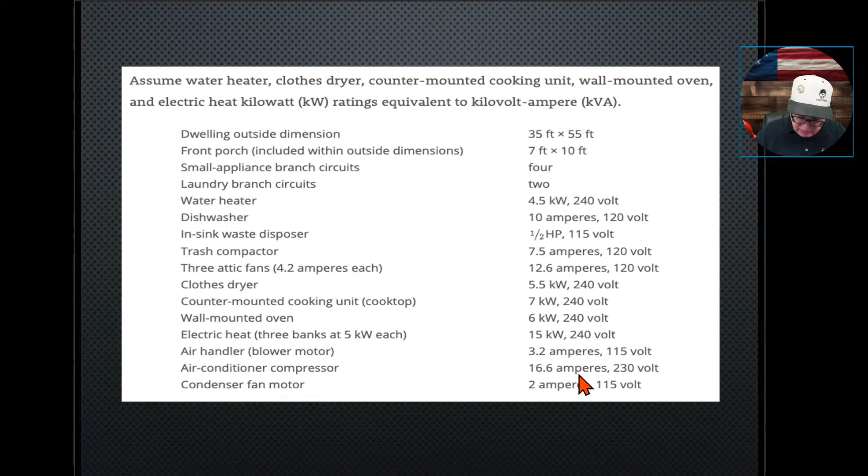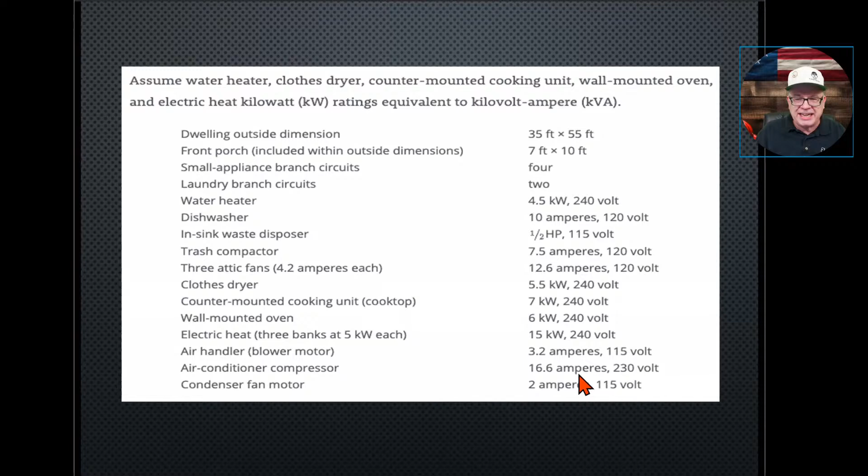This air conditioning compressor, they did the math for us, or at least gave us the amps. So we're going to use what they give us, 16.6 times -- never trust my math, do it yourself. We're going to use 230 because that's what the question gives us. Even though we know it's 240 nominal, we're using what they give us in the question. So in this case, it is 3,818 VA for the air conditioning compressor, just a pure value based on the calculation.

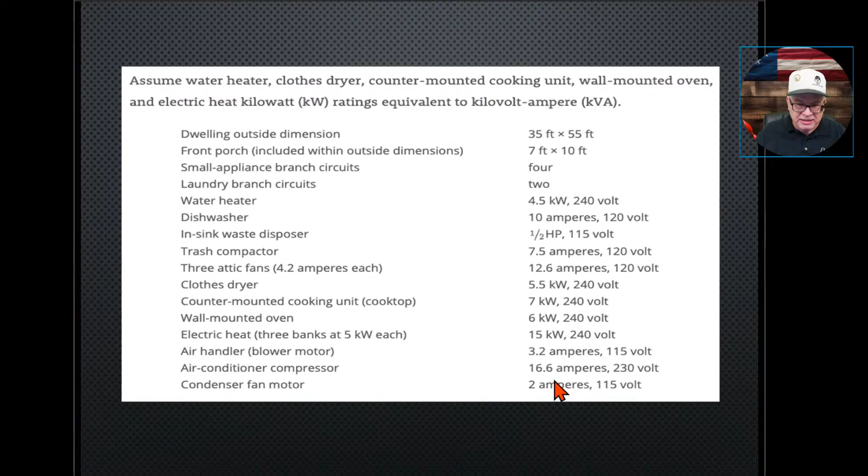And then, of course, the condensing fan, it would be 2 times 115, so that's 230. So we have all of our values here, so we can go on and see how we would apply this.

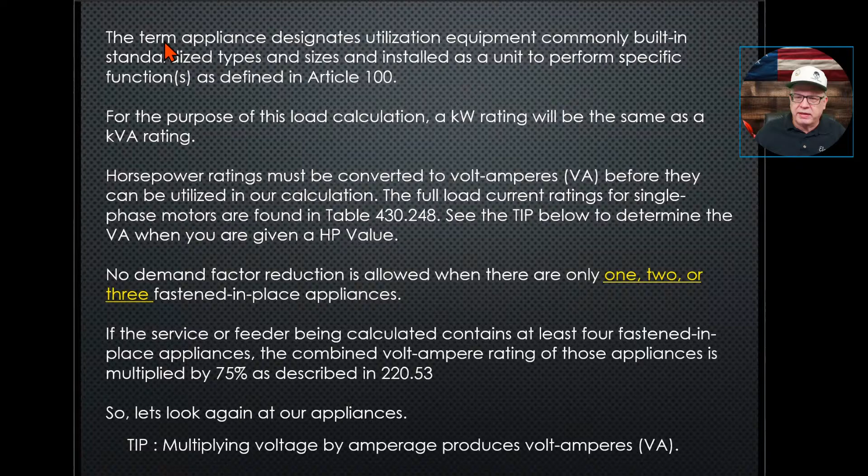So now we just skip to here we go. Okay, so in our case, this is what we're looking at right here. The smaller of the two or more non-coincident loads can be omitted as long as they are never energized simultaneously, as stated in 220.60. We kind of just talked about it.

And people say, let me see that. I will, I'll take you here. It's right here. It says: if it is unlikely that two or more non-coincident loads will be used simultaneously, using only the largest load of the items that will be simultaneously used at one time for calculating the total load of a feeder or service shall be permitted.

So for us, it's a permissive rule. If you want to add up all of the loads and do it, and if you're one of those engineers who says, well, I don't want to take the chance, I can't ensure 100% of non-coincident abilities, then maybe you size everything to 100%, but never for an exam, okay?

So there's a reason they ask you a question on an exam or dealing with it. Now, in the real world, you have to do your due diligence. You have to determine whether something is truly a non-coincidental load, whether there is some type of interlock that prevents one thing from running when something else is running if they're being supplied by the same, let's say, feeder. You'll have to determine that. And that's how we determine that in the overall service.

If I look at it and go, is this going to be running, but another load cannot run at the same time as this load? This load is greater than this load, but this lesser load can never run at the same time this one's running. If that's what you're evaluating, then you're able to discount or remove the lesser of the two because you're going to be taken care of by going with the largest load.

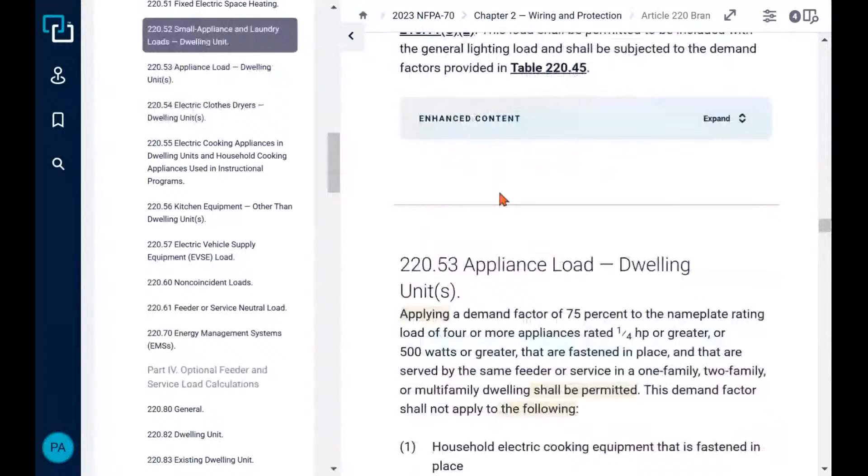So we kind of already did this math a minute ago, but let's go with the first one. So let's compare the heat. So we know that this heat, in accordance with 220.51 in the code, and let's go look at it. Here's 220.51. Bear with me here. Here we go. So the fixed heat portion says fixed electric space heating shall be calculated at 100% of the total connected load, okay? So that's the part we're keying on right here. So that's how we're at the 100% for that fixed load.

So that's 15. So we have the 15, but now we have to realize that it's not just the heat, we also have the blower motor that's going to blow that heat around the building, right? So we have to add that in. We already did the math here earlier. 3.2 times 115, that's 368 VA. Since the loads are going to be operating at the same time, obviously the air handler is going to be running at the same time that the heat's going to be running, then we have to add the two together. So we'll take the 15 plus we'll add the 368 to it. So the heating contribution here is 15,368.

Now, many of you that are already used to doing this, that you've done load calcs before, or that are very savvy at this, already look at this and go, well, I don't even have to look at the AC, right? Because I know that the heat is going to be greater than the AC. But what I need to do is to show you, because it may not be. This one's pretty easy, but it may not be. So you have to go through this exercise of comparison. And this also causes quite a bit of confusion to people when it comes to how do you apply a non-coincident load calculation when it comes to two loads that are non-coincidental, like heat versus AC that are thermostatically separated.

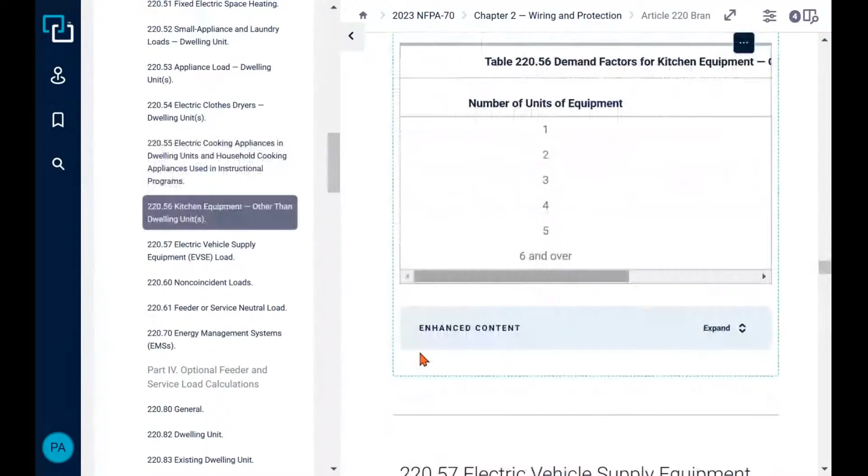All right, so if that's the case, then we have to look at it and say, okay, well, let's go to the NEC. They worded that terribly. We've tried to change it for years, but I'm gonna try to lay this out, James, and make it a little easier for people to understand, hopefully. So let's go down real quickly and look at 220.60. And I've argued that it is poorly worded. It's been poorly worded for years. But we're gonna do our best to try to dissect this out for folks.

So this is the first part of this. And remember, this first part, I wish they'd put this in itemized bullets to make it stand out. But this first part is basically just telling us where we get the permission to choose the larger of the two non-coincidental loads, two loads that can't operate at the same time. So that's that wording. Now, when we identify this, we then need to separate in our brain, left hemisphere versus right hemisphere. We need to move this out of the equation. And then, once we establish that, we focus on this portion. And this portion has evolved over the last couple years, right?

So in this case, it says if a motor or air conditioning load is part of the non-coincident load that is not the largest of the non-coincident loads, then you do 125% of the motor load or air conditioning load, whichever is larger, shall be used in the calculation. Okay, so this opens it up, for example, to be if you're not just dealing with AC versus heat. This is for all applications, all motors, those type of things where you do a non-coincident load.

So in our case, it says, okay, look, you basically have to compare the heat load, if these are non-coincident loads, you compare the heat to the air conditioning load, okay? Now, in comparing the two, you have to say, okay, which one is the larger? Well, in our case, the heat was larger. But of the non-coincident loads, the lesser one, which was the AC, does that have the largest motor? In this case, the hermetic refrigerant motor is considered the motor.

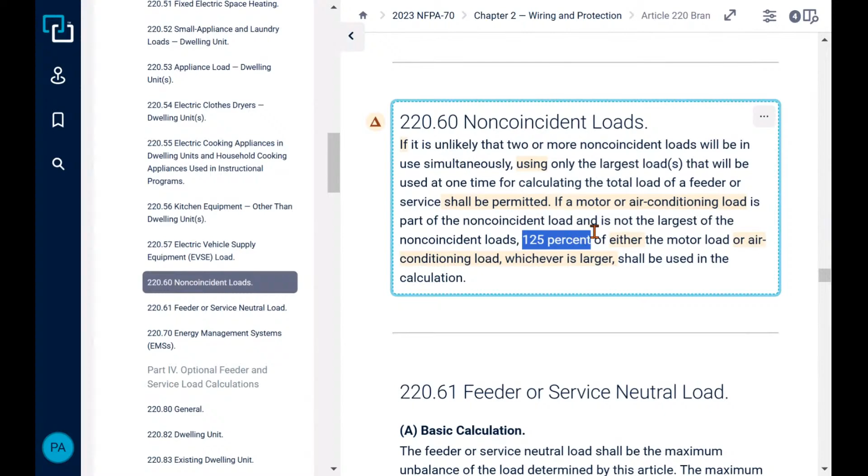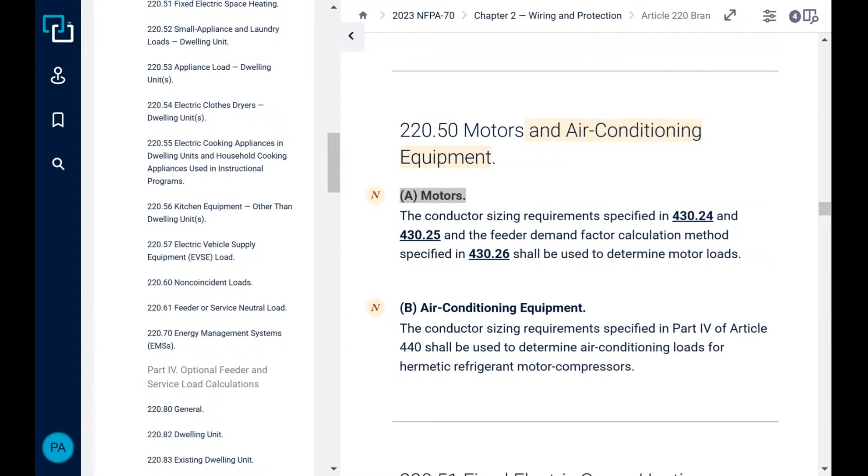Now, one of the things that I like to explain to people when they talk about this right here, why do they get this 125%? All right, so it also harkens back to 220.50, by the way, right here, for motors and air conditioners. Whether you're dealing with air conditioning equipment or a motor, either way, they're going to be talking about taking the largest motor at 125%. If you have multiple motors, they're going to be talking about taking the largest motor at 125% and the sum of all the other motors at 100%.

So in our case, we would have already taken care of that if the AC had been larger than the heat. Since we already took it at 125%, if the AC had won, then we would have already had that largest motor, that 25% figured in. But since it wasn't figured in because we took the heat instead of the AC, we still have to account for the largest motor because we still have to apply 220.50 for the motors that are in this building. Okay? We still have to meet that application. You can't ignore 220.50.

I'm just showing you that sometimes that might get absorbed into the calculation when you're doing non-coincident heat versus AC, because if the AC incorporates that additional 25% in its largest motor, then it might push it above the heat. If it did, then that 25% has already been captured and you wouldn't need to apply 220.50. You don't have to do it twice. Remember, 220.50 is just taking the largest motor at 125%. You've taken every motor in the building already at 100%, so all we're trying to do is capture that additional 25%. If we got it when we did the heat versus AC, then we don't have to do it again.

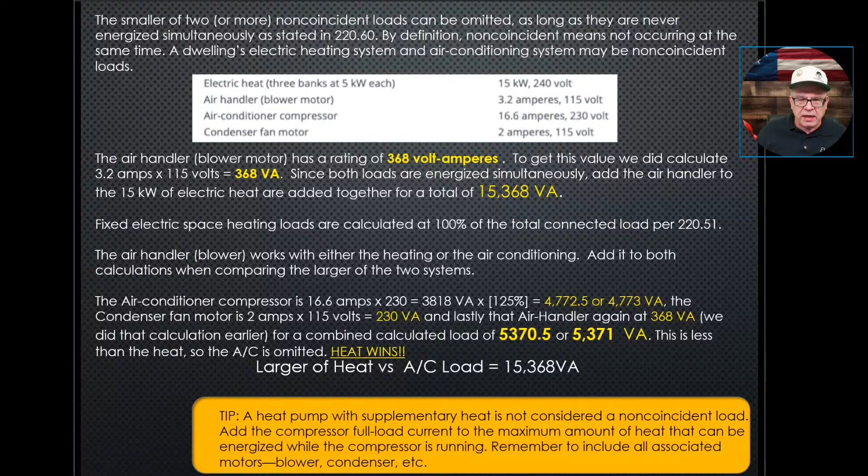But the air compressor will not, because that's a 230 volt application, so it does not have a neutral load contribution. And as far as the heat, none of that would be in your neutral calculation because that's 240 volts. So you're just adding these values in your load calculation for the neutral. But what is important is that when you get to the largest motor, you still have to account for that 25% even when you're doing the neutral. The only difference is you're only looking at the loads that have a neutral contribution. And in our case, all of these have a neutral contribution.

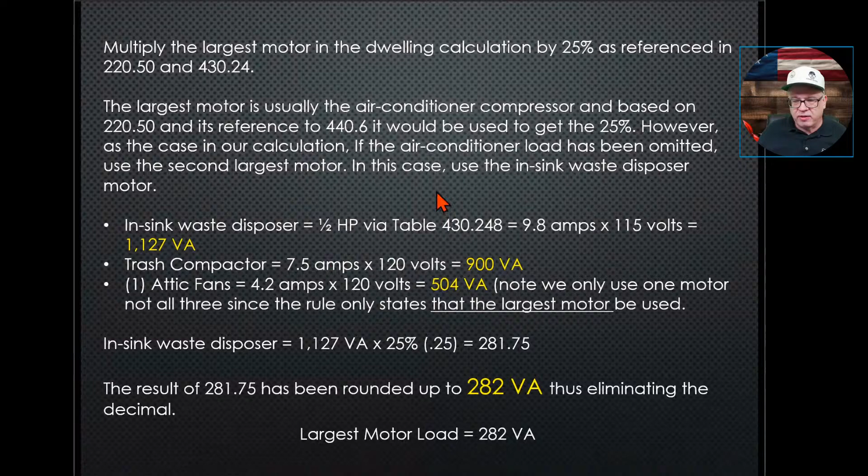Now, the other question people ask is, why didn't you use the compressor here in the largest motor? Because remember, we got rid of it due to the heat versus AC process. It's redundant, but I want to make sure that we're clear on why we got the numbers that we got.

So if you remember, we're pulling back to what we did when we started this whole mess back on Tuesday. We had the value for the general lighting and general loads. We had the value for the fastened in place, and we had 4 or more, so we had already applied a demand factor to that. We had the clothes dryer. We had the cooking appliance. We had the heat versus AC; in our case, you see the heat, we omitted the AC. And we had that largest motor, in our case 282 VA, and you simply add it all up.

So I'm going to double check myself here, just because I like to double check. You never know. You can do it too if you have a calculator. I'll do it for you. So here, let's see. Oop, forgot one here.

Okay. All right. So hold on here. I think I've messed up something here. 7,048. Hold on with me, guys. Let me do it. 6,929. 5,500. 8,450. Plus 15,368. Bear with me, guys. Okay. Plus 282. Forgot to add 282.

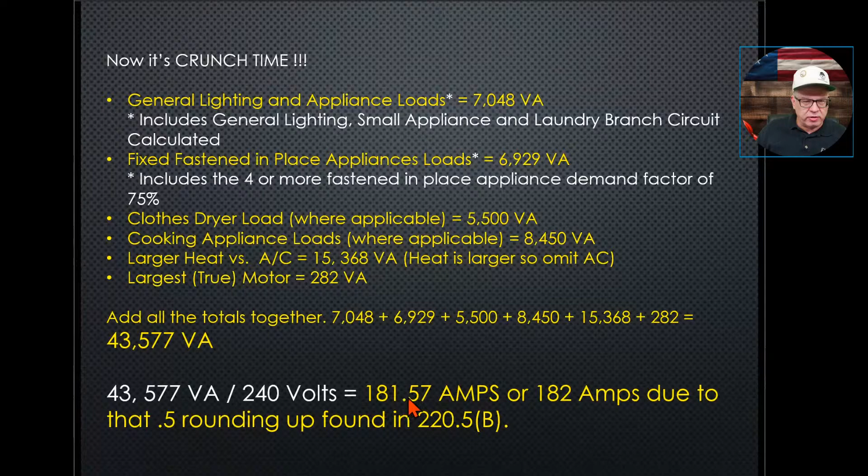Okay. So this is what you should be getting, just what you see on the screen right there. So 43,577 VA. That is our total load after we applied everything. Now we simply just take that, divide that by 240, and you get 181.57. Of course, 0.5, we're dealing in amps, so we're allowed in 220.5(B) to move that to 182, and that is our rounding, okay? So now we have to remember that I have to have overcurrent protection. Does it correspond with 182?

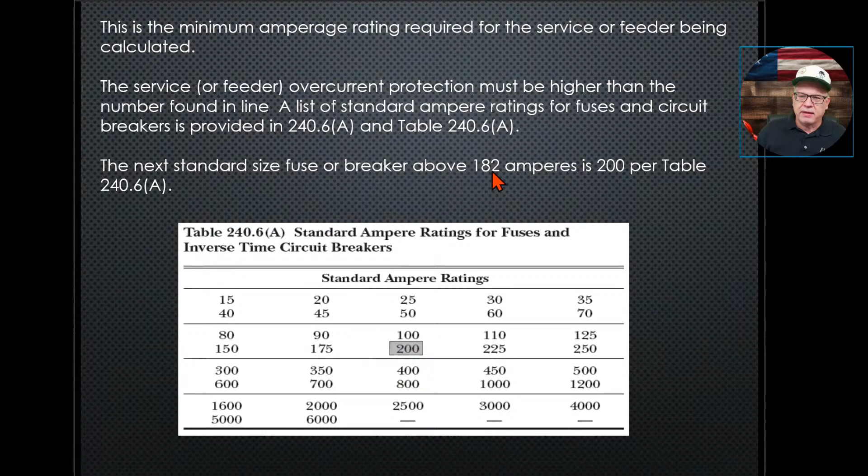Well, if we go to 240.6(A) and we look at these standard ratings, we don't have one at 182, but we have a 200. So I am perfectly okay to have a 200 amp rated service, okay? Now, this is where we get into a lot of questions on exams. We know the answer on the exam is a 200 amp rated service. Now the question becomes, when can I apply the 83% rule?

Now, in the real world, if you want to size everything to the 200 amps and you want to go to 310.16 and size everything, that's fine. You can do it if you want. Nothing prohibits you from doing that. That's totally your choice. However, on an exam and in the real world personally, it's always the issue of wanting to find the best possible answer. And finding the best possible answer means that we're going to use 310.12, all right? 310.12(A) is for the services, 310.12(B) is for the feeder, okay?

And I have a separate video on this that explains the application of 310.12, the 83% rule, and things like that. But it's basically 83%. The conductors have to be at least 83% of the rating of the service or feeder, and that's going to be based on the overcurrent device, okay? And so 83% of a 200 amp is what we're looking for in this case for the minimum. Service conductors have to be at least this size. Can it be larger? Absolutely. They got to be at least this size.

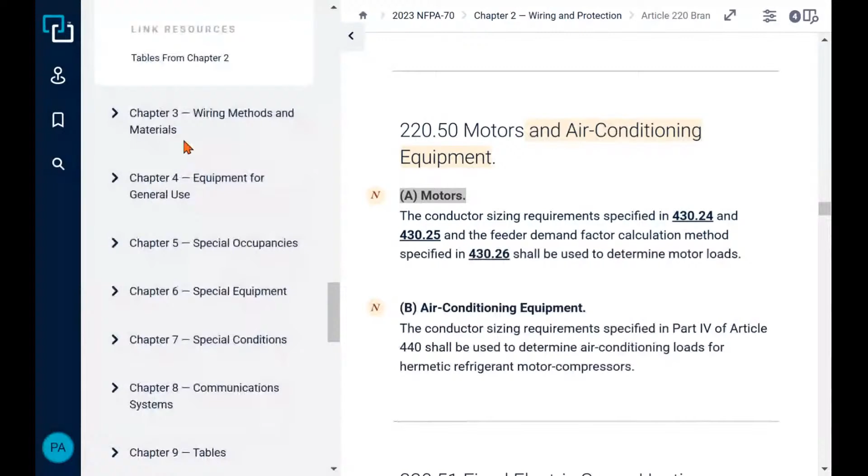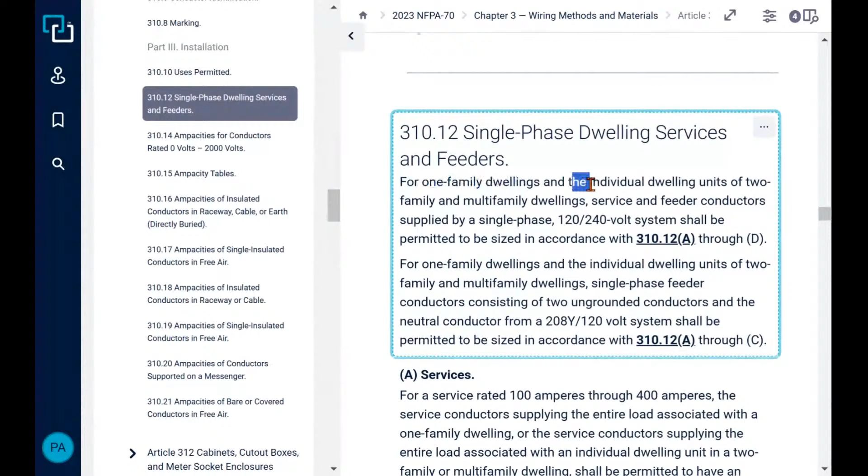Okay, so in this case, 310.12, we'll look at it right here. So this is a one family dwelling. That's what we're doing, but it's also good for individual dwelling units and two family dwellings, that type of thing. And it is also applicable to multifamily dwellings. Okay, so in our case, we're doing the service. So we have to make sure we check all the boxes, right? Based on our calculation, is it rated 100 amps through 400? Absolutely. Is this service we're sizing handling 100% of the loads for this dwelling?

Absolutely it is. Okay. And so again, it says that it shall be permitted to have an ampacity, these are the conductors again, not less than 83%. Not less than, can be more than, but not less than 83% of the service rating. Okay? And if there's no adjustment or corrections, means you don't have any ambient temperature other than 30 degrees Celsius, 86 degrees Fahrenheit. I know you all look at that when you're doing your services. Womp, womp, womp. But anyway, and if you have not more than 3 current-carrying conductors, which you probably won't for a single family dwelling, then you can apply this table. And then you have to do nothing. So all I would do here is say, okay, it's a 200 amp rating.

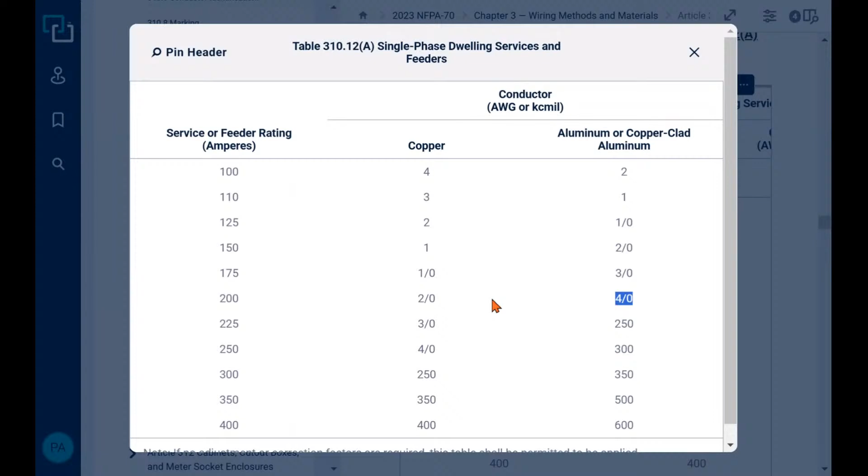That's what we determined it was. So it's 2-aught copper, 4-aught aluminum. Pretty straightforward. Now, where it becomes dicey is if you do have to do an adjustment or correction.

Then you're going to do an adjustment or correction just like we always would. You'd have to determine what you need for an ampacity. So for example, if I did 200, which is the marking on the breaker, and I'm multiplying that times 0.83, that's 166 amps. So after adjustment and correction purposes, I have to make sure I still have a conductor good for 166 if I want to use the 83%.

So I would do it just like any other adjustment or correction. I'd take the value I need, which is 166, and divide that by whatever modifier I have, whether it's using 310.15C1 for the number of current-carrying conductors, which you probably won't use. It's usually going to be the one done in 310.15(B)(1), where the ambient temperature deviates from the normal ampacities in 310.16, which is 30 degrees Celsius, 86 degrees Fahrenheit.

Again, if you're up north, you know you really are going to deviate from the 30 degrees Celsius and 86 degrees Fahrenheit. But how many of you actually figure that in? On an exam, they've got to give you this info, otherwise you don't know. So they have to tell you what the ambient is. And that should be a trigger for you that it's not simply something you'd just pull from the table. If they're giving you ambient temperatures and telling you it's a certain value, that should trigger ding, ding, ding, ding, ding, that you're going to have to do our normal calculation.

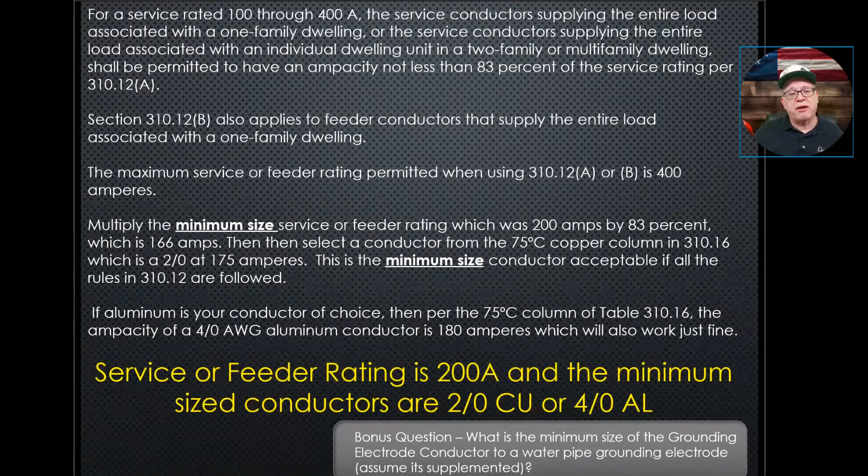All right, so anyway, again in this case, it's a 2-aught copper or 4-aught aluminum would be the size for that. Now, when it comes to the neutral loads, that was just simply a matter of us adding all of those values up in order to come to the neutral.

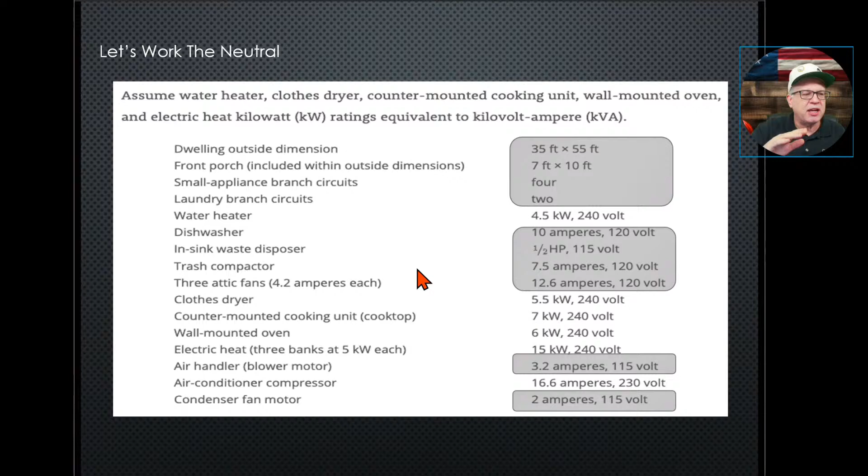So let me kind of give you an idea of what that is, just so we can end positively. Of our loads that we did today, these were the only things that were neutral. And remember, you do the same calculation for the neutral as you did for the standard. The only thing you're doing is you're leaving off anything that's 240 volt, okay? So in these calculations for the neutral, all of these are neutral loads, right?

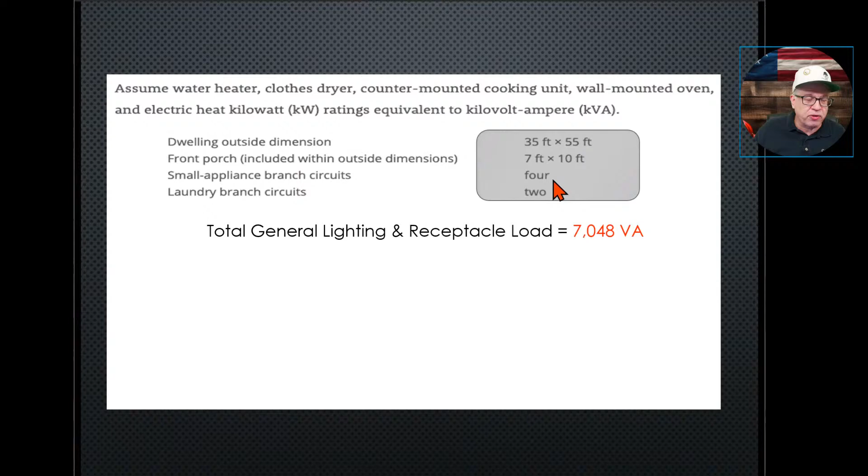So you keep the same value that you did in the first step we did on Tuesday. Same number. That doesn't change. Of the appliances, the only ones that you're going to use are the ones that have a neutral contribution. And by the way, if it's still 4 or more appliances, you most certainly still get to apply the 75% to it. Just because it's a neutral doesn't mean you don't get to. I used to say what's good for the goose is good for the gander. So in this case, I just leave off the water heater because that's a 240 volt. So we're just leaving that appliance off.

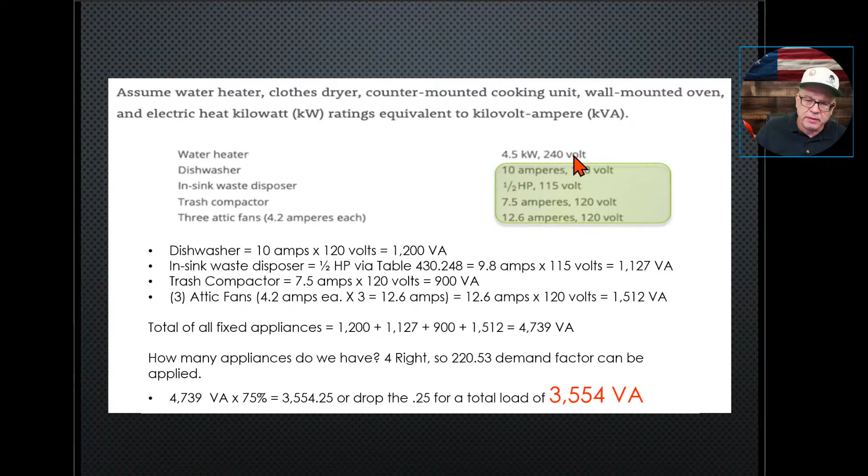The next, when it comes to clothes dryers and the cooking, same thing applies here. We get the allowance in 220.61(B), and we talked about this in the last episode. I take the value that we calculate out, and I get to multiply that, or what we say, do an additional demand of 70%. Where do we get that allowance? In 220.61(B). So if I had to show you that, so that you can quantify it. Again, we're doing the neutral right now. Under the standard method, if we go right here, you'll notice that it is still under the standard. It's not under the optional down here. It's still under Part III, and very important.

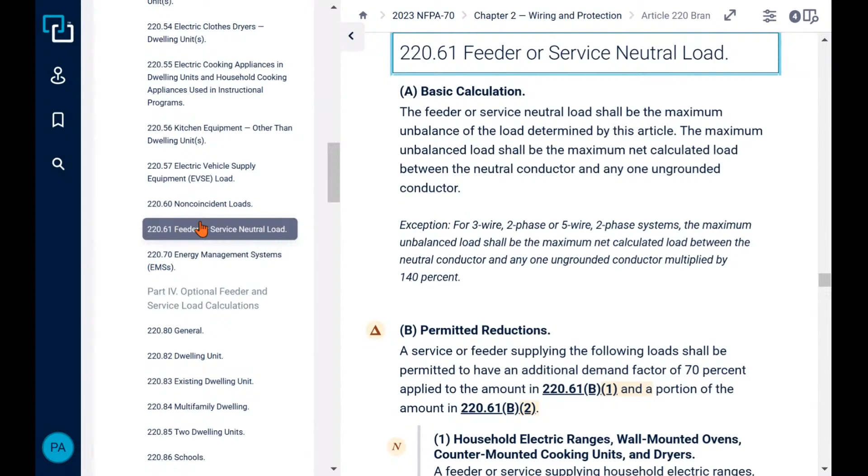So here's our neutral, right? And down here, we get permitted reductions. And in our case right here, the household cooking, and then of course clothes dryers, it says a feeder or service supplying household electric ranges, wall-mounted ovens, counter-mounted cooking units, and electric dryers. It says where the maximum unbalanced load has been determined, and it has been determined. We've already done the calculation. We know what that load is, in accordance with Table 220.55 and Table 220.54. So what is it allowing us? It says that an additional demand factor of 70% shall be applied. So we're able to apply an additional 70.

Now, when you say additional, Paul, people go, what do you mean additional? Well, we already applied demands, didn't we? We used 220.55 for the ranges, and we applied demands. For the dryers, we applied any demands where they were applicable. We've already done all that. So all this is saying, look, I'm going to let you do a 70% demand on the value that you calculated under the standard method. So you just simply are doing a 70% multiplier.

So in our case, that's what we did for the neutral. We took that 5,500, which is that dryer. 70% of that is 3,850. So we're reducing it 30. And then, of course, we had the values that we got from the cooking we did. We had 8,450 VA or watts. And again, we're going to apply 70% to that for the neutral. And that would be 5,915.

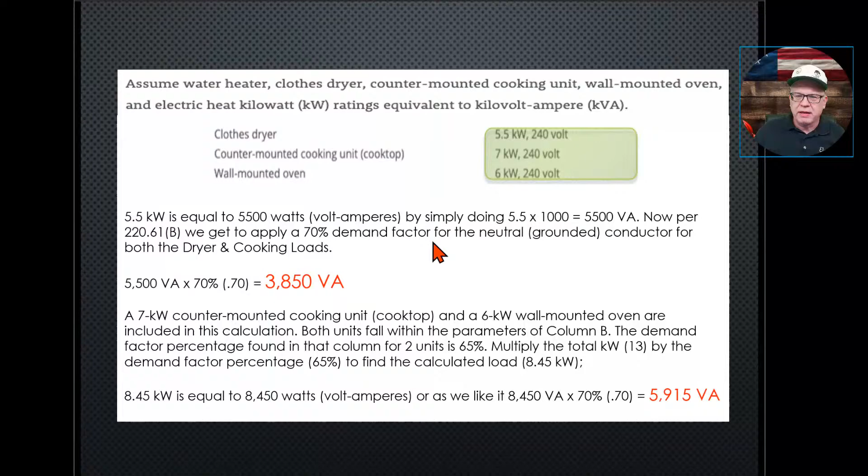And of course, when we're doing the AC and heat, we don't do a comparison here. We don't have to worry about the heat because that's 240. There's no neutral. But that condenser fan and that air handler both have neutral contributions. So there's no comparison. You just simply add those into the equation. So again, at the end of the day, you add both of these together. So that'd be 598. That is my neutral contribution, okay?

Obviously, both of these are going to be running at the same time because that air handler is always going to be running. But the condenser fan is running only when the AC is running, but they both will be at the same time, and we're looking for neutral contributions. So both of those contribute to the neutral.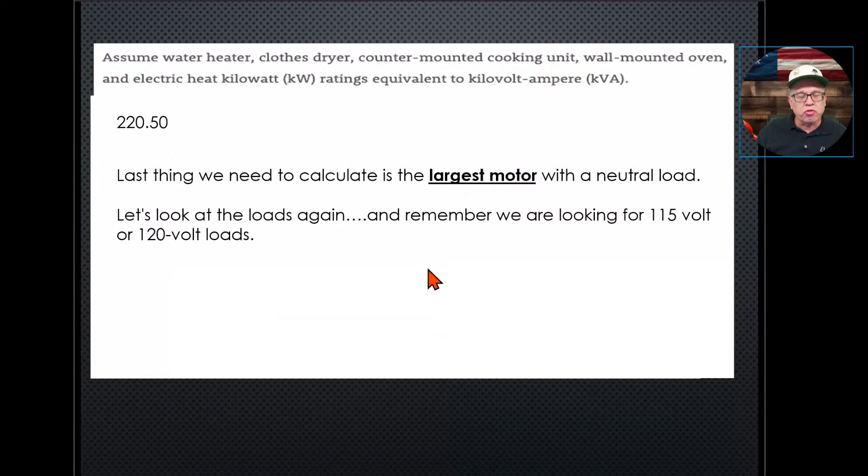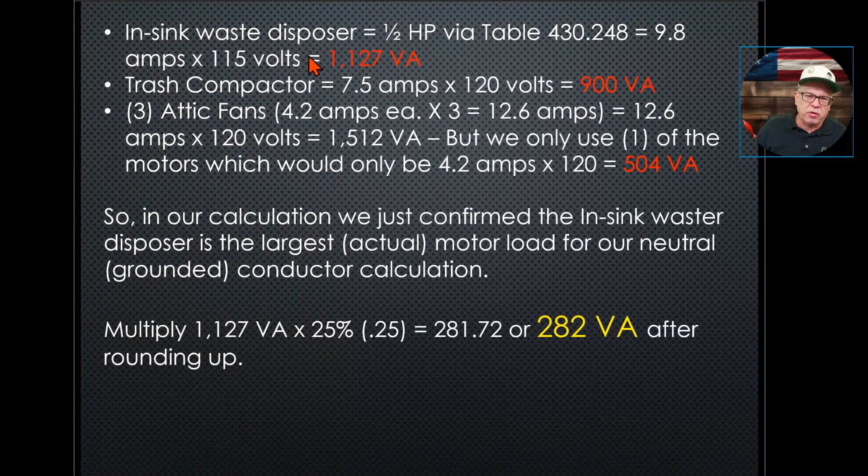Again, the last thing we need to do is find that largest motor. As I said earlier, you still have to do that when it comes to the neutral, but you're only looking for the largest motor that has a neutral contribution. In our case, we looked at all these again, and it's the same value as before because the in-sink waste disposer is our largest neutral contribution for that scenario. So that's exactly the same.

So when we're looking at our neutrals, these are all the values we take: there's our 70% of our cooking appliances, our 70% of our dryer loads, and all of our fixed appliances that have 120. We got to apply the 75% to the original amount because we have 4 or more. We applied the same general lighting and general use and all the circuits here because they all have neutral contribution — they're all 120 volt circuits, so they're all neutral.

And we compared — we did the heating and air conditioning. We looked at those loads that run simultaneously, and then we looked for the largest motor. Then we just add this all up together, and I'll do this to make sure our math is right.

So 7,048 plus 3,554 plus 3,850 plus 5,915 plus 598 plus 282. That's 21,247 — that's what I've got. Hopefully that's what you got. And we divide that by 240, and that's 88.52 amps, or we're able to round this to 89 amps due to that 220.5 allowance.

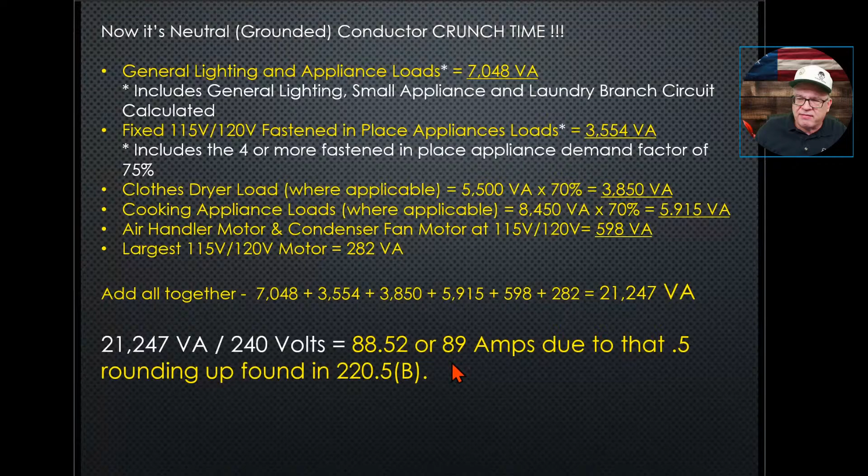So in this case, we have to go find a conductor in Table 310.16 that's good for 89 amps. For copper, it would be a 3, and for aluminum, it would be a 2. That'd be adequate for 89 amps, okay.

Now, one last note — even though we go through this cycle of math and pick the conductor based on the calculated load for that neutral, it still cannot be smaller than what's given in 250.102(C)(1) for this situation. So what conductor size did we pick earlier, when it came to the ungrounded conductors? Remember what size we had?

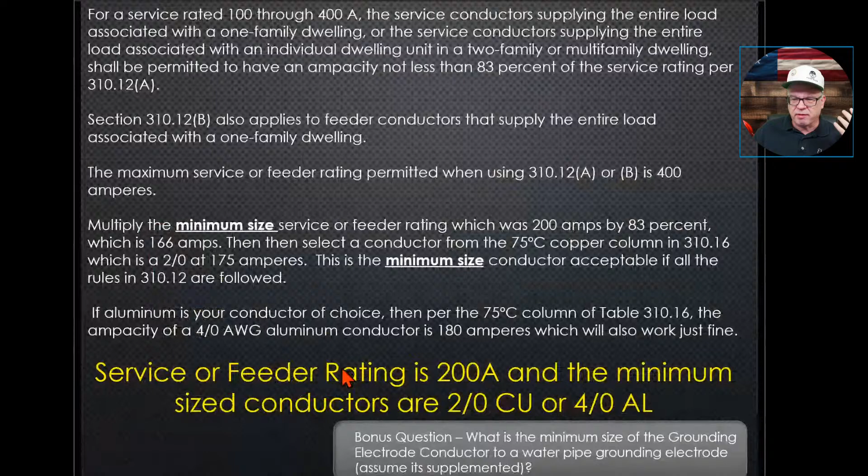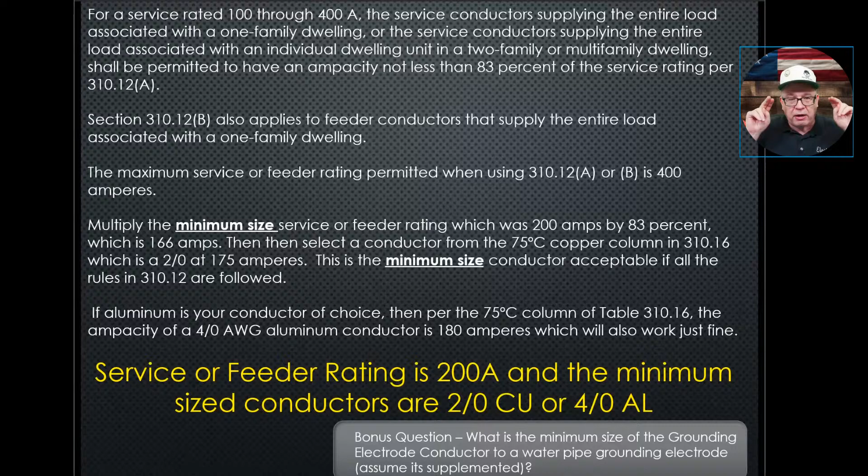Let's go back real quick — in our case, it was, let's say copper, so it's 2-aught copper. The neutral can't be less than what's in 250.102(C)(1), although we know what we need because we did a load calculation. But anyway, if we go to the NEC to make sure, double check us, because we know what the code says — it cannot be less, and that says so in 250.24. So we're going to go double check really quickly to make sure we're not less.

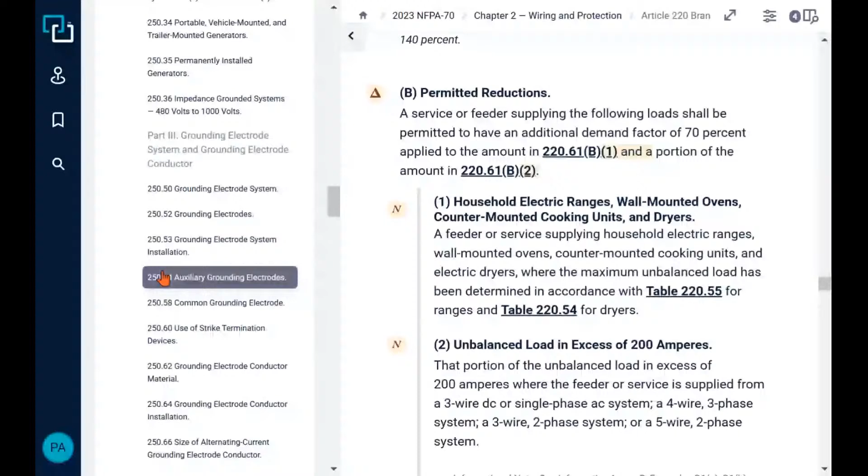Let's go here, just double checking ourselves. Remember this table — I'll pop it up. Remember, this is also for sizing the grounded conductor, and it can't be less than this table. In our case, our ungrounded conductor for this service, based on what we did with 83% and all that, was a 2-aught copper. So we come down here — the grounded conductor cannot be smaller than a 4.

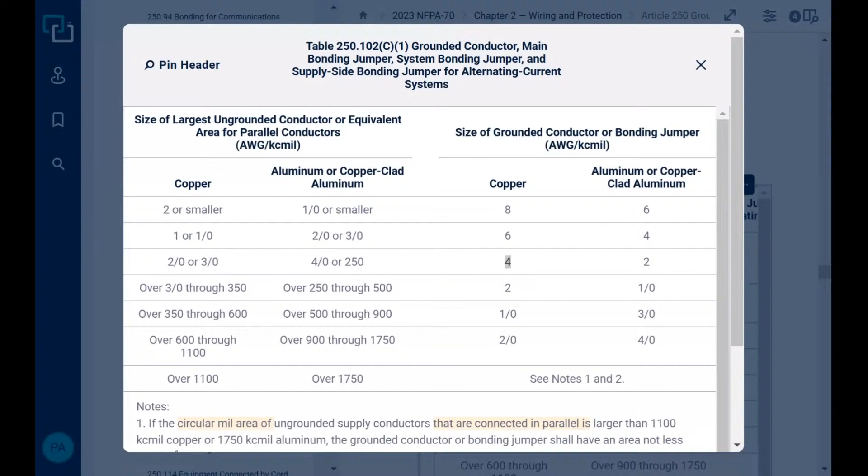In the example we did for our neutral conductor, we'll go back to the lesson — in ours, we had a 3. A 3 is larger than a 4, hoping you understand how American Wire Gauge works. So obviously we're going to be sizing it based on the calculated neutral load versus the minimum requirements of 250.102(C)(1). But you see how that works — we just go and double check the table, that's all.

Okay, a lot of info in that episode today.